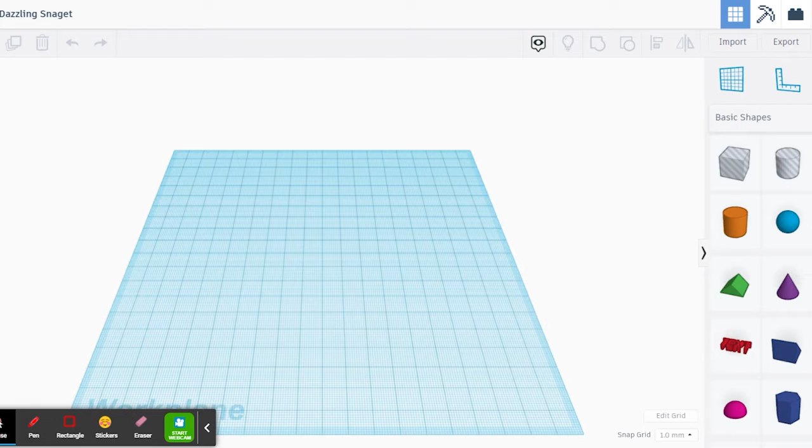I'm going to show you what some of the tools on the screen can do. That way you can be creative and experiment when you're creating your garden stake. So first, to name the design, in the top left corner, you'll want to click on the name that shows up on the screen. So this one says, unique combination of words. You'll want to delete that and then type your first name, first initial of your last name, underscore or dash, and then the color that you would like the garden stake printed.

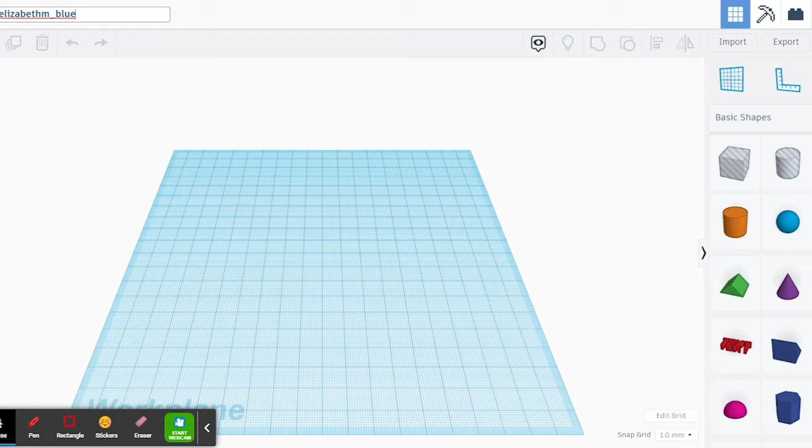So we have three options right now. There's blue, silver, or there's a dark pink, almost magenta. So you can put, I'm going to put blue. You can also put silver or either magenta or pink. And then you can click anywhere on the screen to save that. So that way, when I go into the class, I can look at your name and I'll know what color to print it. And then I'll be able to access your design.

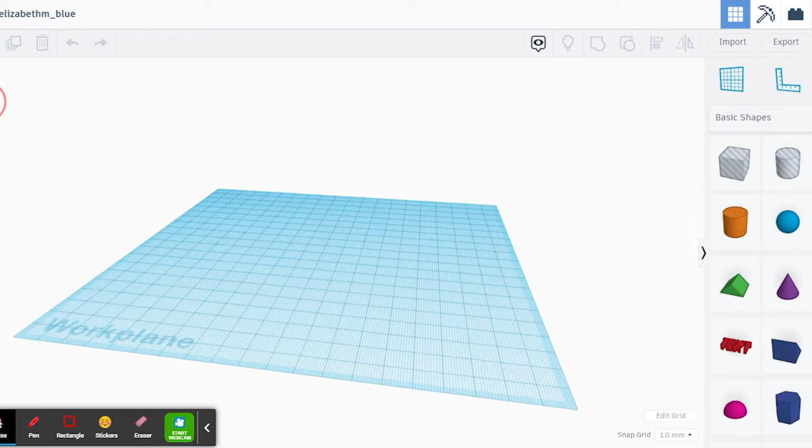So looking at the plane again, you'll notice on the left, there's this box that says top front. This is how you can actually change the view of the plane. So if you needed to look underneath or on the sides, you could change that. That's great for 3D printing because you'll want to make sure that there's no holes or gaps anywhere. So that's why you'll want that full view. If you ever get kind of lost and you need to go back to where you started, you can hit the home button and it'll set that back to the beginning for you.

You can also zoom in and zoom out using the keys on the left side of the screen. If your mouse has a scroll in the middle, you can also use that to zoom in and out. At the top left, it's not an option right now because I don't have any objects on the plane, but you can also select the undo and redo button if you'd like to go back. If you'd like to delete something, you can select the trash can once that object is selected. If you select the object, you can also hit the backspace button or delete on the keyboard as well.

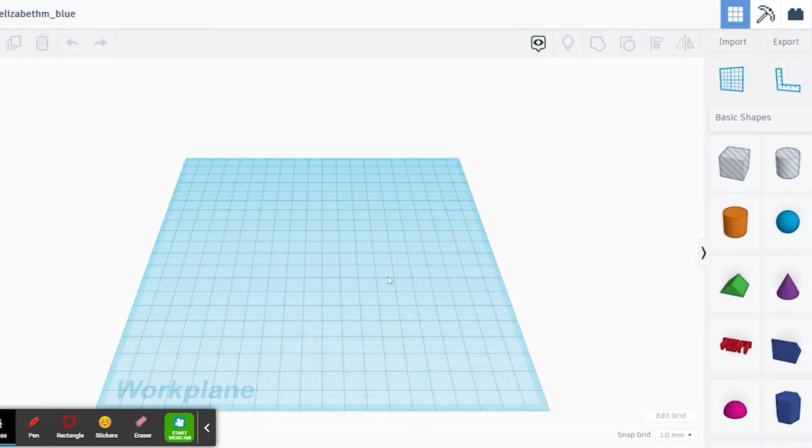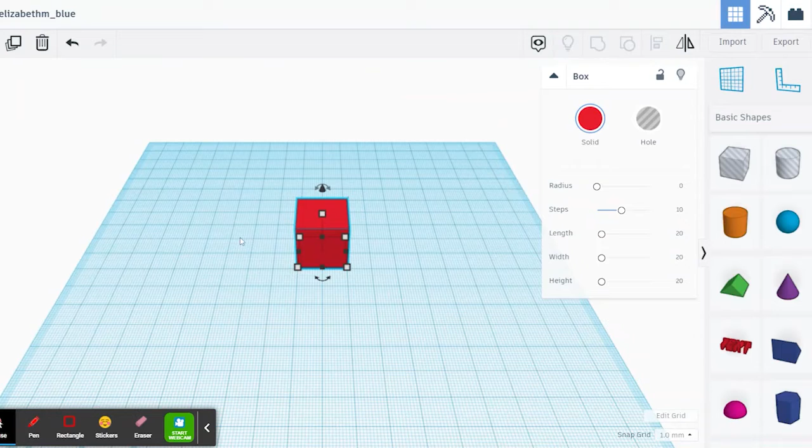So to add a shape, on the right-hand side, you will see some basic shapes available. So I'm going to add the square as an example and drop that onto the plane. So you just click, you drag, and then you drop. And it'll sit flat on the plane like that. There's a couple options to change the size of the shape. So using these black squares on the shape, if you hold and then drag it, it'll change that side of the shape. So this will make it longer.

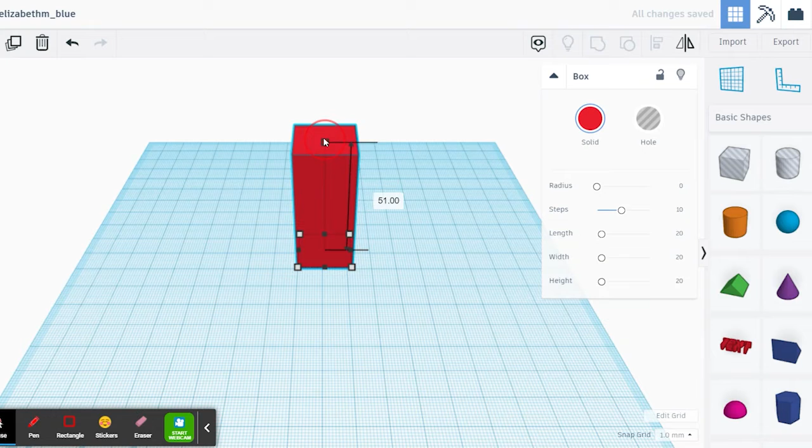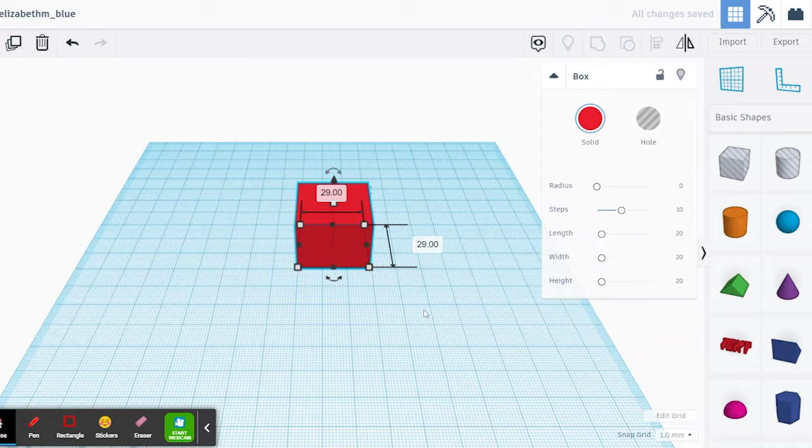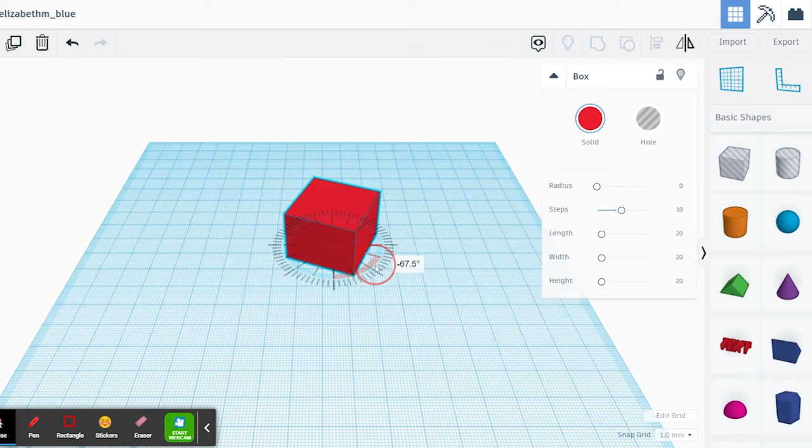The white squares will increase the height and the width. So this one on the side. If you hit the diagonal white squares like I'm doing right now, you'll change the entire shape at once. So that's just a basic overview of how to change the sizes. If you look underneath the object, you'll see the arrows. If you hover the mouse over that, you can click on the arrows and hold it, and then you can kind of rotate the object around. So say you want it to look like a diamond, you could rotate it like this.

There's also arrows on the top. So if you hover over, you'll see the different options. The last thing that you'll notice is a cone at the top. This will pick the object off of the plane and kind of float it in the air. And you'll see the numbers changing as I'm lifting the object up. So I'm going to put it back down. And when it's flat, you'll see that it lines up there at the bottom and it'll say 0. So 0 is back on the work plane, so that's where you'll want to be when you're creating your stake.

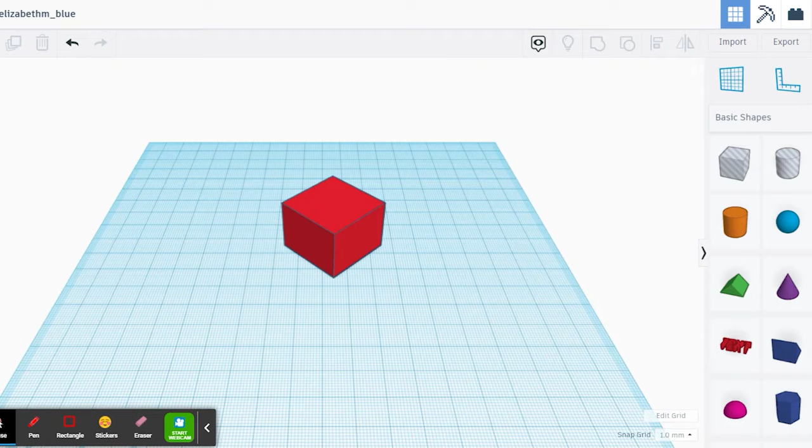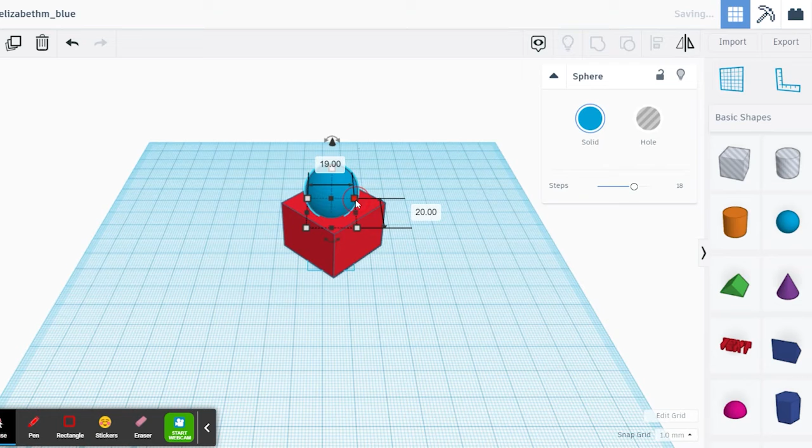You can also stack objects. So like I have this circle, I'm going to stack it on top. You'll want to hold the cone up to place it on top of the square. And you can change the size of that. So you can be creative and play around. There's so many different shapes on the right-hand side that you can choose from, and you can change them as you'd like. I'm going to delete both of these objects. I'm going to click on them, hit the backspace button, click, hit the backspace button.

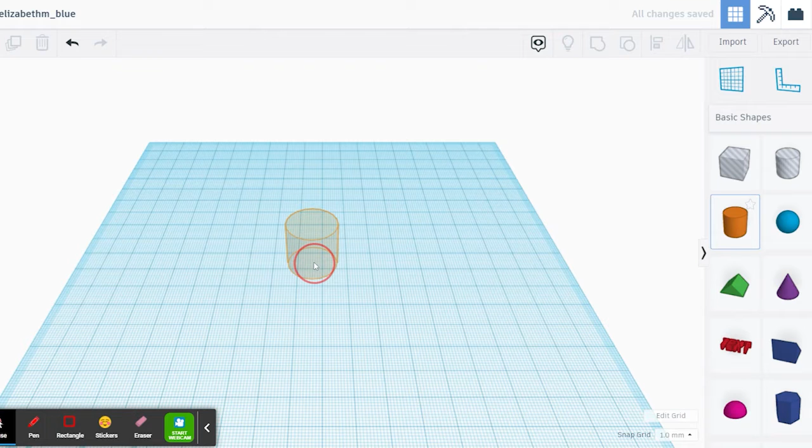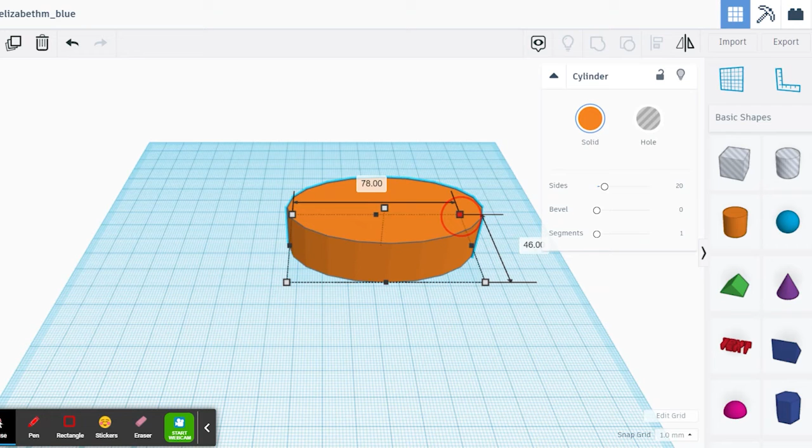My garden stake, I kind of like the oval shape, so I'm going to pick the circle. It's kind of a cylinder. I'm going to put that on the plane. I'm going to take one of these diagonal white box buttons, click and hold it to make an oval shape. I found that about 75 millimeters wide, so that's that top number. Somewhere between 75 and 80 is a good size. But you can play around depending on the shape too. And if it's too big or too small, or if the details are too small, we will play around with it and we'll adjust it so that it prints out correctly. So we'll adjust it later. So I like that size for the oval.

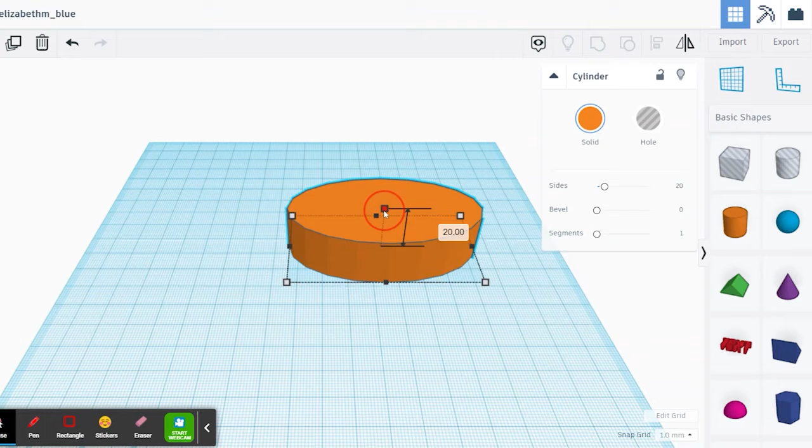I am going to make it a little bit thinner. So this white box at the top, if you hold that down, it'll minimize the thickness of it. So now it says it's 8. I think 1 or 2 is a pretty good spot because you don't want it too thick. It'll be too clunky for the garden stake. All of the kits, when you pick up your different stakes, will come with a popsicle stick. You have 2 options. I'll show you how to create a slot. That way you can slide the popsicle stick through it. Or if you don't want to make the slot, you can also just glue the sign onto the popsicle stick as well. So that's up to you.

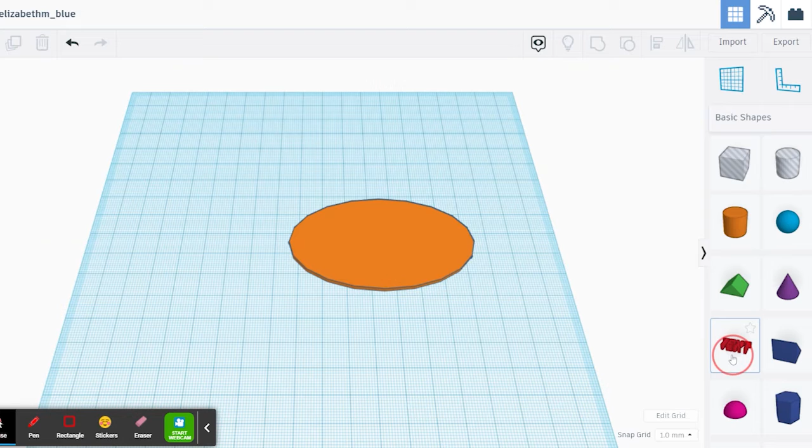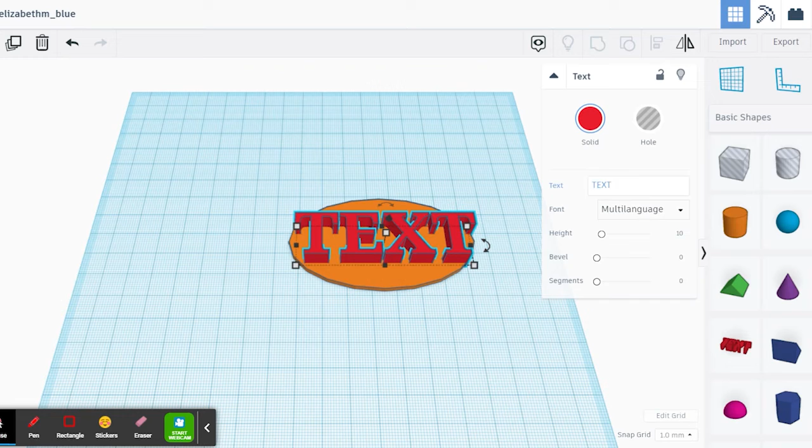So I like the shape of this as the base of the sign. I'm going to add some text. So on the right-hand side, you'll see in red the text. You're going to hold that and drag it over and place it on top of the base. Don't worry about the colors of the different symbols, the shapes. When you print it out, it'll print out in the color that you chose. So I chose blue, so mine will print out blue. So the text will come up with a text box. If you click where it says text, you can change what you want it to say. So I'm going to change mine to peas. You can also change the font. So I'm going to change this to sans.

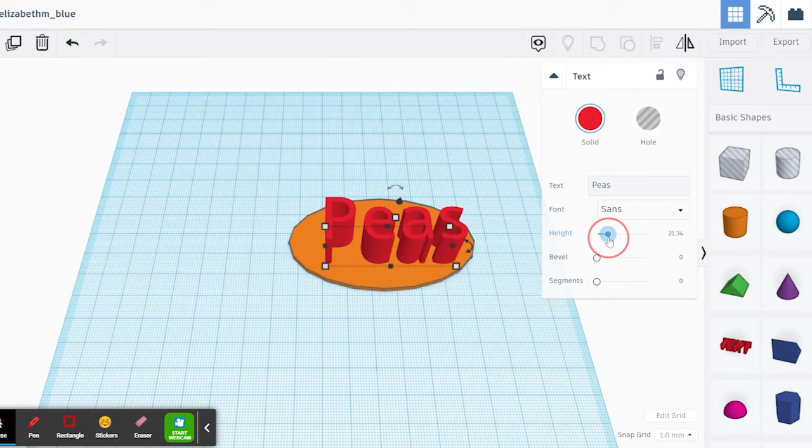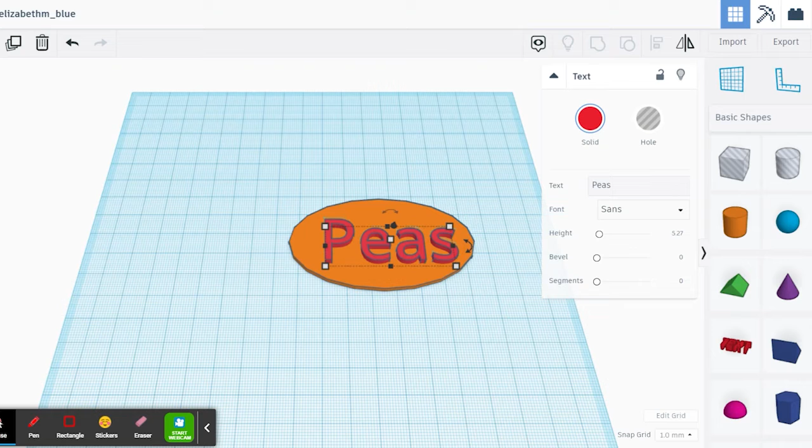And then you can change the size using the scale. I'll kind of guide you. I think 4 or 5 is probably a good height. That way it kind of pops off of the base a little bit. And you can also use whiteout or a black permanent marker to draw over the letters if you want it to pop even more, because otherwise it'll just all be blue. So you can play around with that. Or you can also take the white square and you can move it up and down as well. So whichever you prefer.

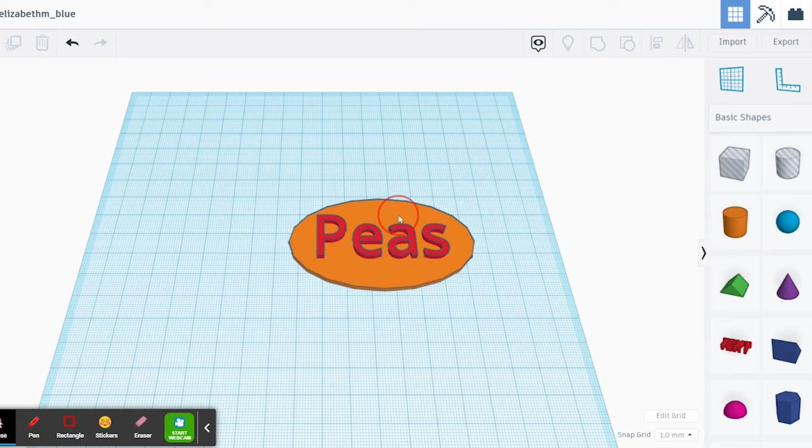I'm going to move this to the center of the design. And then you can decorate it however you'd like. You can add different objects sticking off the sides. I created some with like a tomato or a pepper sticking off on the corner. You can put the design right on the base, so it's not sticking out at all. Just like the text, it'll kind of stick up so you can still see it, and you can adjust it to be as big or as small as you'd like.

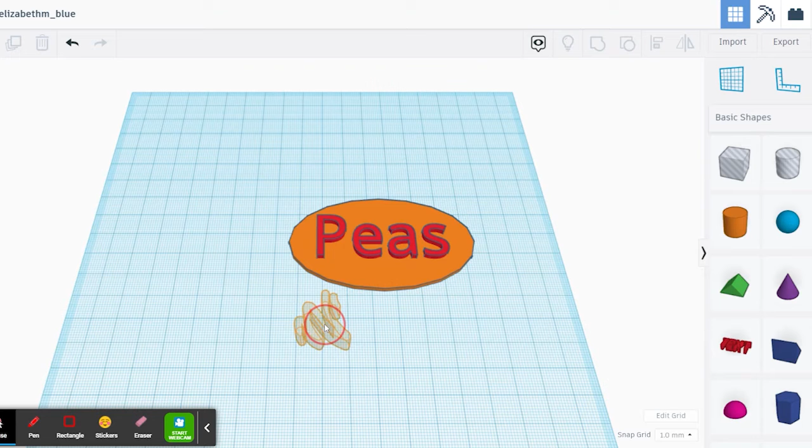You can also create the base in the shape of a vegetable. So I can show you, for example, on the right-hand side, there's a scribble, it's called. If you select that and pull it over, I just pulled it over to a blank spot on the work plane. Say I want mine to look like a tomato. You can kind of draw out a tomato.

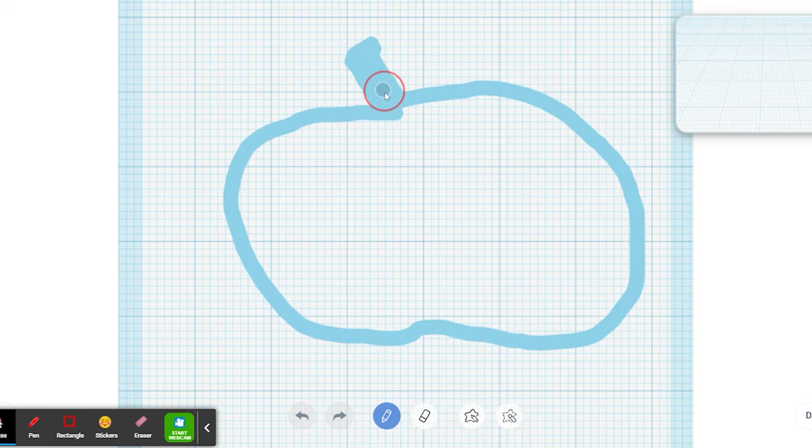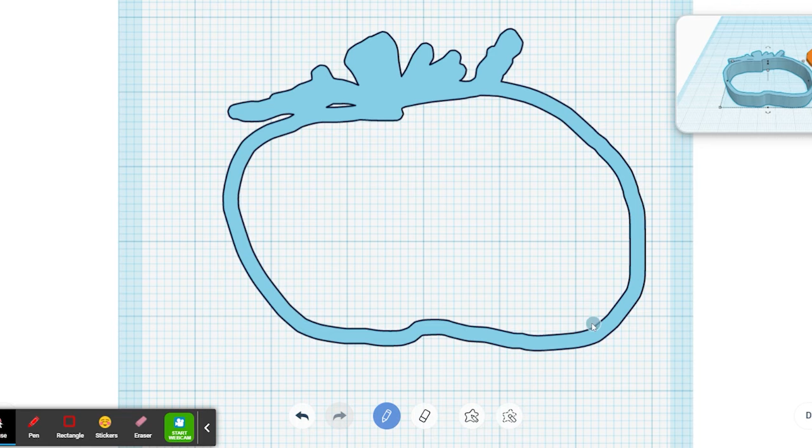And then you'll want to fill it in. When it's hollow, it doesn't really print out quite right. So I'm just going to do quick leaves. And then you can add some vines. Just a quick example, but then I would fill it in as well. I just don't want to take too much time showing you, so we'll just pretend like that's filled in.

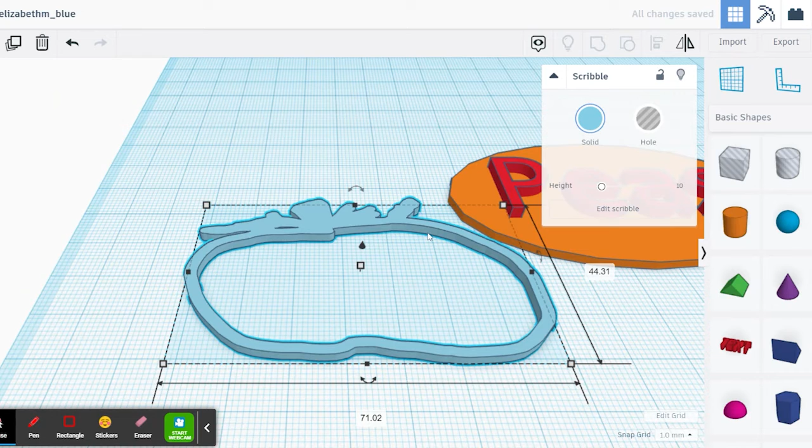So once you hit done, it'll be on the work plane, and then you can minimize the thickness, and then you can change the size. So say I want it to look a little more wide so I can put text in there. You can put the text inside. So that's just an example of how you can make the entire stake look like a shape.

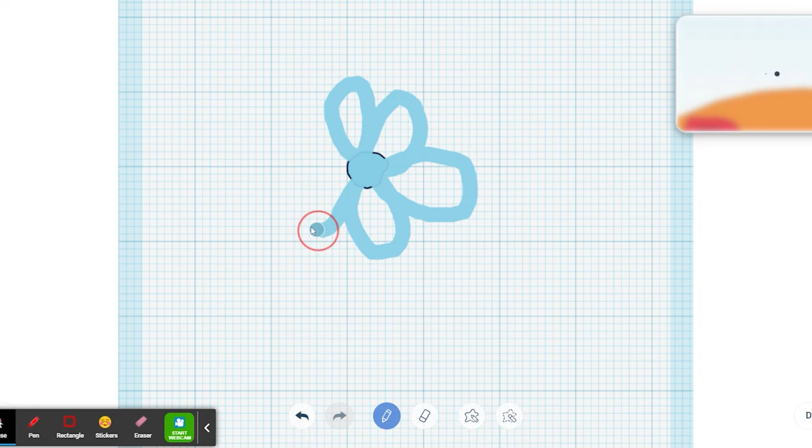For the pieces, say you want to add like a flower to your stake. Draw a quick flower. Like I said, I've made little tomatoes, little peppers to go on there as well. So here's my flower. I'm going to go back to the home so that way it's centered again.

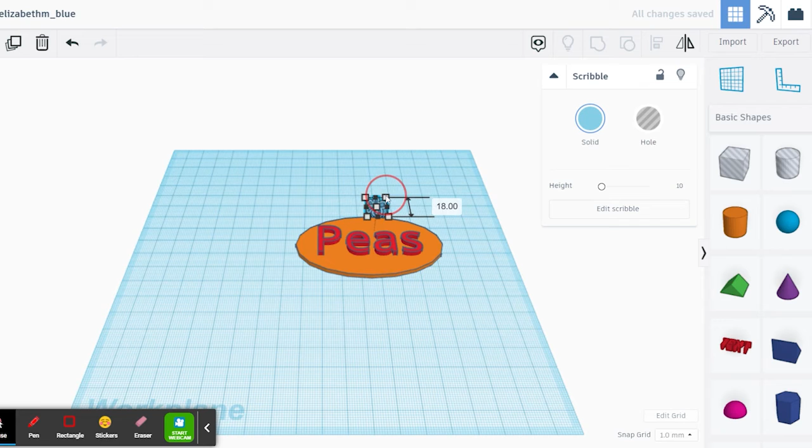So the flower, you can minimize the thickness again. You can make it smaller or bigger. If you want to have it going off of a corner, or if you want to make it really small, you could have it on the base itself. So just some examples.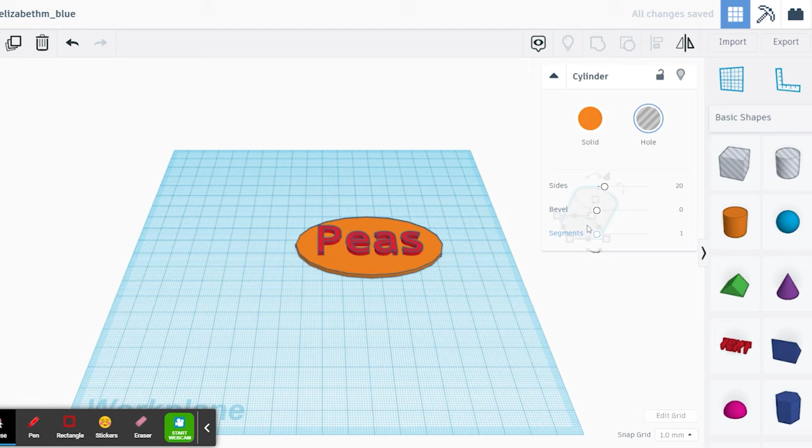If you would like to put slots on the sign, that way the popsicle stick can just slide right through, what you'll need to do is on the right side, there's two shapes that have lines through them. These will create a hole. So if you're making like a necklace, you can put a hole at the top, or a tag or something. But for this one, I'll delete my cylinder. I'm going to use the box shape. I'm going to drag it over.

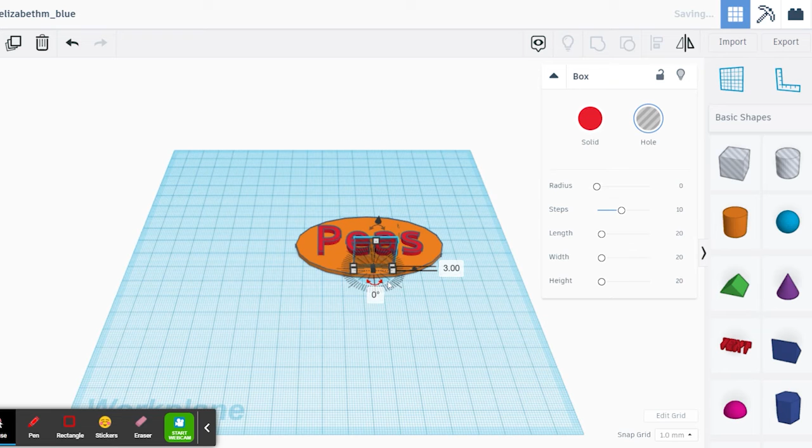And you'll want to make it a little bit smaller and wider so that it's a slot for the popsicle stick. So I found that about 3 millimeters tall, 2 to 3. I wouldn't go bigger than 3 or it'll be too loose for the popsicle stick. And about 22, 25 millimeters long. That's 25 by 3. So I'll get a little bit closer so you can see. So I like that size.

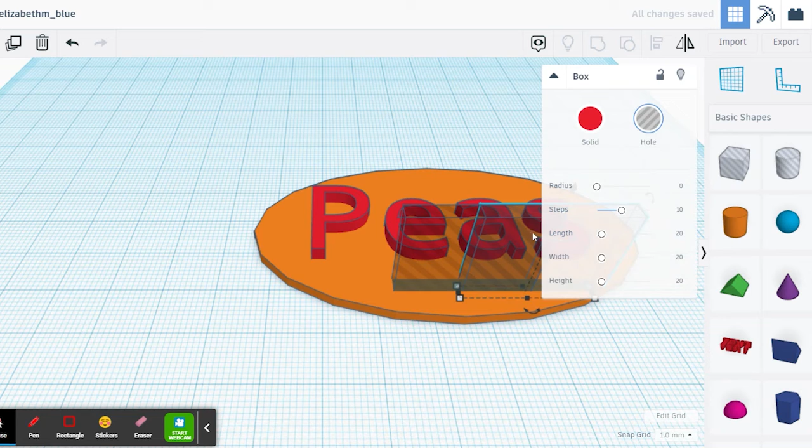You're going to need one at the top and the bottom. So you can either copy it by hitting at the top left side of the screen, or you can hold down your control key and hit C, and it'll copy it. And then if you hold down and hit control V, it'll paste it. So you'll see a duplicate of that shape you created. And it'll kind of give you a guide to show you if it's in line with the other shape.

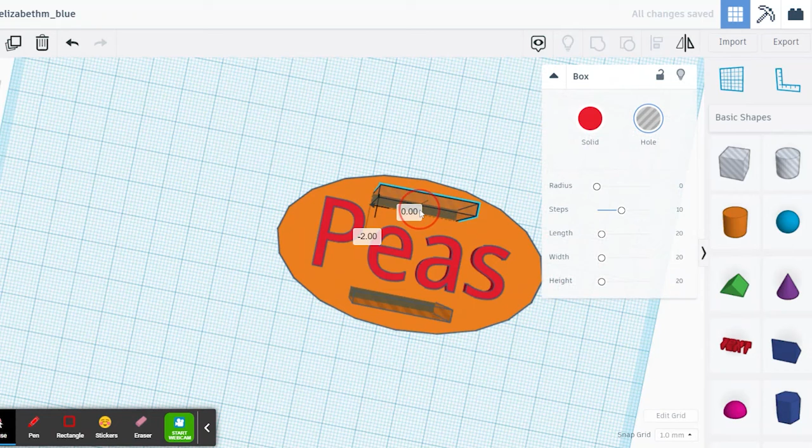So I'm going to drag it right on top. I'm going to just go to a top view so I can see a little bit better, and I'll drag that down. So it looks how you want it to look. So again, you can decorate this however you'd like. You can be creative and create different shapes and designs. This is just a really basic one just to kind of show you how it looks. But you can design them however you like for your garden.

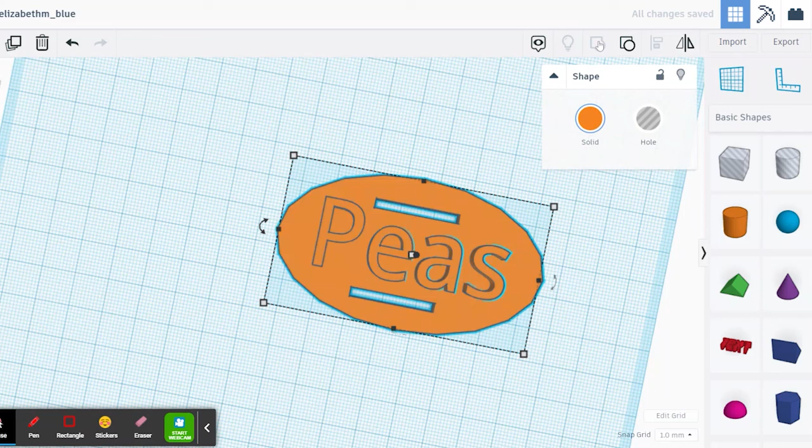Once you're done, you'll want to take the mouse and drag it over the design and then release the mouse. It'll select everything in that area. And then on the top right, you'll see a symbol, looks like a square and a circle. It says group. So you'll want to select that. It'll group it together. And then you'll kind of see what it looks like when it's done.

So once you're done being creative and designing all of your different signs, you can just leave them here. It'll save it automatically. Like I said, make sure that it's labeled correctly on the top left. And then I will take a look at all of the designs on Monday, March 28th, and we will print the designs that are there. And like I said, we'll adjust if they're too big or too small. If you need more time, just email me, let me know. But otherwise, we'll go ahead and start printing the designs on March 28th.

So even if you weren't able to participate in the live presentation of this program, you're welcome to still create a garden stake, and we'll print that out for you. Give us about 2 weeks to finish printing the stakes, and then they will be available at the circulation desk or the pickup window. So please let me know if you have any questions, but otherwise, happy making.